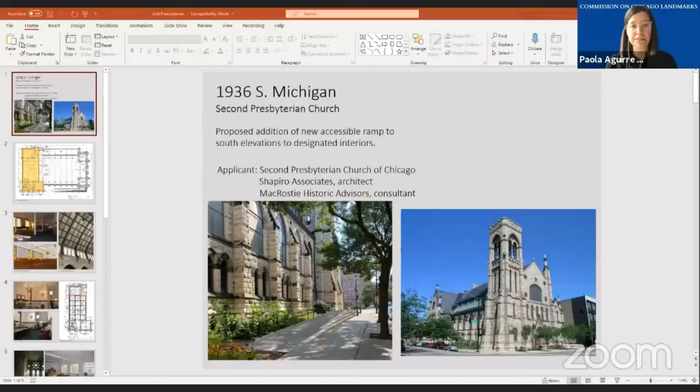We're going to move into item number 1, which is at 1936 South Michigan, the Second Presbyterian Church. I would like to call on Emily for the presentation. Thank you, Commissioner. So the church is proposing a number of interior improvements to the parish house, which is west of the sanctuary, as well as the addition of a new wheelchair ramp on the south elevation for an accessible entrance.

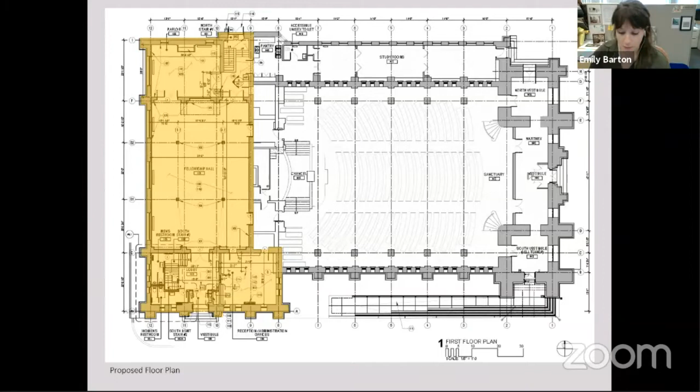So the church is proposing to make several improvements to the parish house, which is to the west of the main sanctuary space and highlighted in yellow.

The first floor of the parish house is home primarily to the double height fellowship hall and parlor. These spaces have been altered significantly over the past, and photos provided by the applicant indicate that many original features were likely removed in the past.

The wooden wainscoting around the room is proposed to be retained, as are the arched reliefs on the north elevation. The original stained glass windows to the west are also proposed to remain.

In the fellowship hall, there is currently a non-historic suspended acoustic tile ceiling that is proposed to be removed and replaced with a painted coffered ceiling with concealed LED cove lighting.

The design of the coffered ceiling is a simplified, compatible reference to the ornate coffered ceiling found within the main sanctuary. The walls above the wainscoting will be covered in acoustic paneling and a lightly textured wall covering.

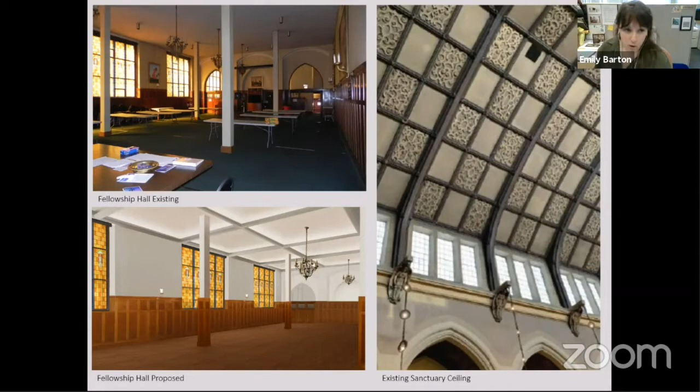And wooden wainscoting matching the height and profile of the walls will be added to the columns throughout the room. The non-historic carpet will also be removed and replaced with new wood plank flooring.

The parlor space is very similar to the fellowship hall, but without the paneled wainscoting around. So minor modifications are proposed to be made to this space, with the largest intervention being the addition of a full height wall to the east.

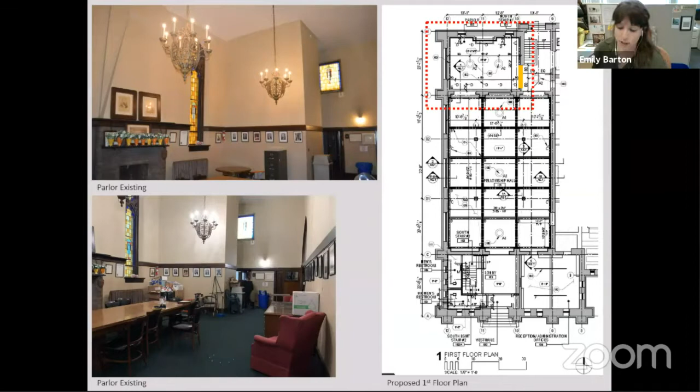You can see it drawn in yellow there to enclose the room, removing the currently open portal to the northern stair.

The third floor consists of the gymnasium, where no work is proposed, the boutique room, the music director's office, and the Oriel room, and a conference room.

Besides the ornate windows, which are proposed to remain, these spaces are largely plain. Two windows in the boutique room, which are not visible anywhere from the street, are proposed to be replaced in kind.

And similar to the other spaces in the parish house, the church proposes to replace the non-historic flooring and repair plasterwork as needed throughout the 3rd floor.

The church's southern stairwell is in the southwest corner of the parish house and will largely remain as is. The current men's and women's bathrooms on the 1st floor behind these stairs are proposed to be renovated with new fixtures and tile, with no work proposed in the main sanctuary.

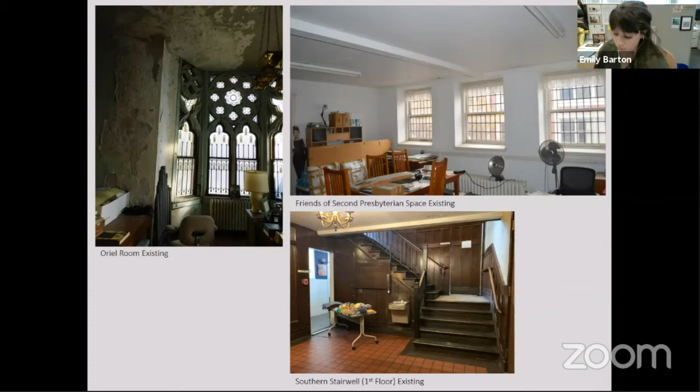Because of the significant modifications in the past, the compatibility of the improvements, and that the work will not result in removal or loss of any existing historic elements, staff recommends approval of all interior modifications as proposed.

So in order to add an accessible entrance to the building, the church is proposing the addition of a ramp on the south elevation, approximately 8 feet in width and 56 feet in length.

The northern side of the ramp will align with the south bell tower entrance bay, which allows for a significant setback from the sanctuary wall and windows.

Something else to mention is this won't encroach into the public way. It will still be on the church's property.

The existing stairs will be salvaged and put in storage for future use, and the new ramp will connect to the bell tower entrance with a 1/2-inch expansion joint, leaving the existing door threshold to remain.

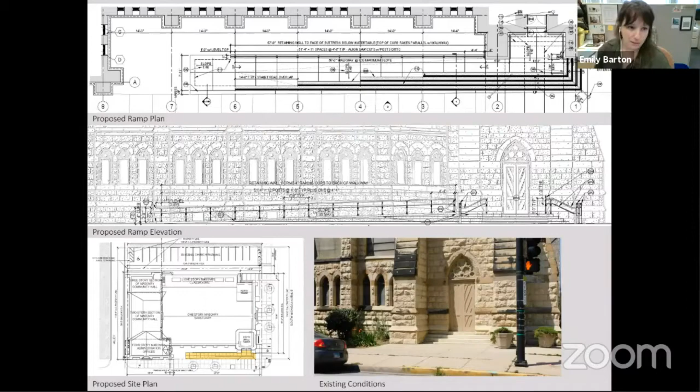The northern side of the ramp will also feature a minimal metal safety handrail with decorative posts to match the handrails on the east elevation of the church.

The ramp is designed to be constructed primarily out of concrete with an overlapping step design of sandstone stairs. The stone treads are 1 foot in width, with a new tread introduced approximately every 14 feet.

Because of the step design of the ramp, a second handrail to the south is not required, further minimizing the visual impact of the ramp to the building.

Because of the necessity to add an accessible entrance to the church, the non-intrusive minimal design, and the setback from the front facade, staff recommends that the new ramp will not be an adverse effect to the building and recommend approval as proposed. Material samples shall be submitted to staff prior to order and installation.

The last bit of work is on the west elevation of the building in the southern corner along the alley. The church is proposing to add exterior HVAC equipment in an existing setback bay. Two wooden bumper rails, approximately 6 feet long and 2 feet 8 inches high, will be installed to protect the equipment from vehicles driving through the alley.

This elevation is largely unornamental, as you can see, and because it is a secondary elevation, staff recommends that this location will not be an adverse effect to the building. So staff recommends approval with the condition mentioned. An approval letter from Alderman Dowell was included in your packets, and I believe we have a representative from the church, the historic consultant, and the architect here, if you have any questions for them.

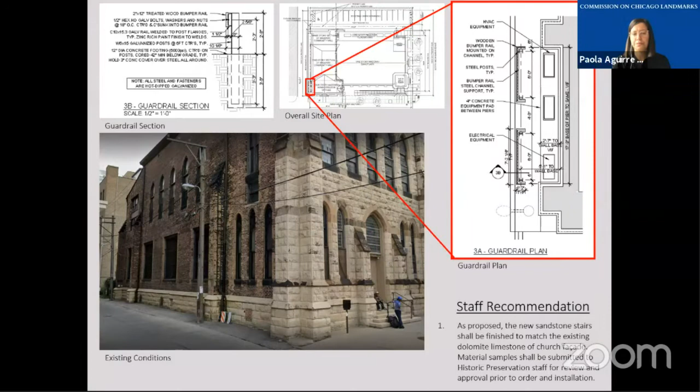Hi, can you guys see and hear me? Great. My name is John Kramer. I'm from MacRostie Historic Advisors here in Chicago. I'm serving as the historic preservation consultant for the Second Presbyterian team. I'm also a volunteer tour guide at the church for the independent nonprofit Friends organization, which helps with preservation efforts of the church. And I'm also joined on the Zoom today by a representative of the church, Mike Bellatier, and the project architect, Don Shapiro, in case the commission members have any questions.

In case you're not familiar with Second Presbyterian Church on South Michigan Avenue, it's a National Historic Landmark church, well known for its 1870s Gothic revival stone facade, its stained glass windows, and its very unique arts and crafts style interior. The congregation is making the proposed changes we're requesting today as part of a National Fund for Sacred Places grant opportunity, with the goal of making it easier for the public to access and enjoy this historic church. The team is also applying for funding from the Adopt a Landmark program. If you haven't been to the church, we invite you and all members of the public who may be listening in to please come down and see Second Presbyterian at one of our public tours.

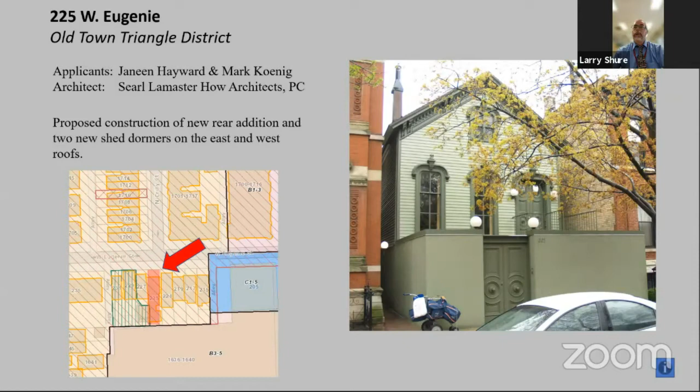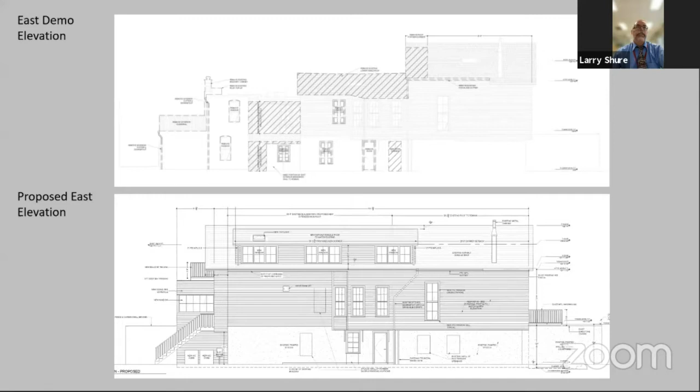The owners are proposing to remove portions of the existing rear additions to the building and construct a new rear addition which matches the width, height, and roof slope of the front portion of the property. They also propose to expand the living space on the attic floor with 2 new dormers on the east and west slope of the roof. This exhibit shows the extent of removal and the proposed additions on the east elevation, and the next slide will show the exact same thing on the west elevation.

As I mentioned, the rear additions are proposed to match the historic cladding and align with the existing walls and roof lines. In May of 2010, the commission adopted criteria to be used in evaluating whether proposed new dormers on front-facing gable-roofed cottages in the Old Town Triangle District will have an adverse effect on the district when such dormers would be visible from the public rights-of-way. Staff reviewed the proposal pursuant to these criteria and also reviewed a mock-up at the site to determine the potential visibility of the proposed dormers.

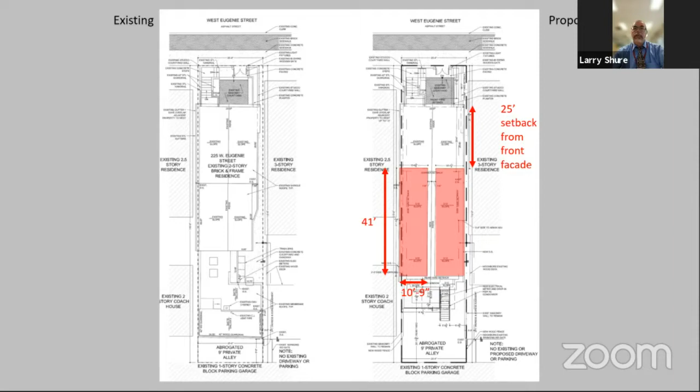The dormer policy for the Old Town Triangle District recommends a 25-foot setback, or a setback equal to 60% of the length of the primary gable roof structure, whichever is greater. The primary gabled portion of 225 Eugenie is 55.68 feet in length, resulting in a recommended setback of 33.4 feet. Therefore, the applicant would be required to set back the proposed dormers an additional 8.4 feet to meet the dormer policy.

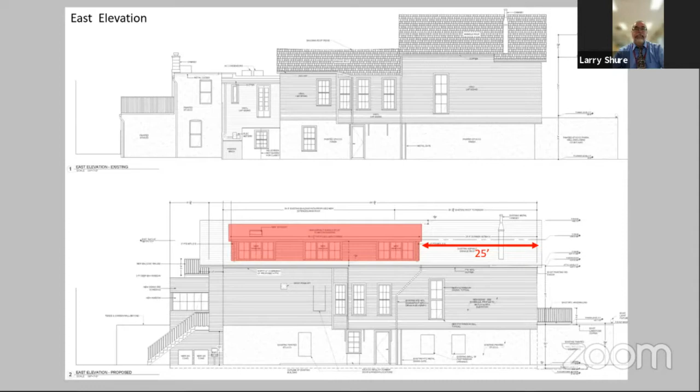In addition to the dormer, the applicant also proposes a skylight on the west slope of the roof. Staff recommends this be approved based on its minimal visibility, provided that the curb is low profile and matches the color of the roofing shingles.

According to the applicant, meeting the 33.4-foot dormer setback requires eliminating a bedroom, bathroom, and laundry room, due to their inability to provide sufficient floor area with the minimum required ceiling height. These are some graphics they put together to illustrate the additional square footage that would be provided by the 25-foot setback.

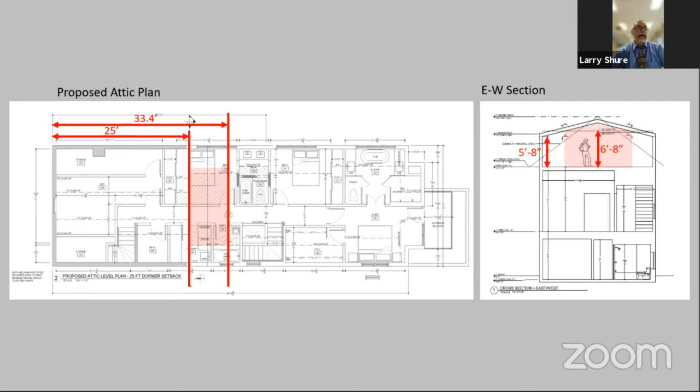The applicants provided dormer mock-ups for their preferred 25-foot setback for staff review. Based on the mock-up, the east and west dormers are somewhat visible from vantage points to the north. Because the property aligns with Crilly Court, there are additional points of visibility further north, though minimized by distance. These vantage points show visibility at the corner of Eugenie and Crilly, and further north on Crilly, as well as back to the east corner at Eugenie and Crilly.

To support their case for a decreased setback, the applicants provided perspective renderings from both the 25-foot and 33-foot dormer setbacks to supplement the mock-up provided for staff review. Based on the renderings, the dormers set back 25 feet are slightly more visible than those at the 33.4 setback. Here are some additional images showing the extent of visibility from those different vantage points up and down Crilly Court.

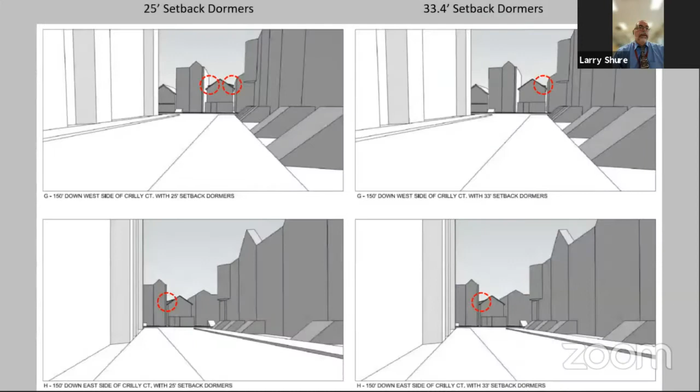In December of 2009, the committee approved construction of new dormers at 335 West Concord. In December of 2011, the committee approved dormers for the home at 319 West Concord. Both of these projects met the dormer policy but present greater visibility from the public right-of-way than the proposed dormers at 225 West Eugenie.

For that reason, we are presenting two options for recommended conditions of approval. The first suggests a strict interpretation of the policy, requiring the dormers be modified to set back 33.4 feet to meet that policy, with remaining conditions relating to the siding of the dormers and the proposed skylight. The alternative recommendation suggests that, based on the minimal difference in visibility, the committee could approve the proposed setback of the dormers at 25 feet, with the other conditions remaining the same.

That is really all I've got to present. I do want to mention that the architects and owners are at the meeting as well, and I believe they'll also want to address the particular issues of the project. If there are any questions for me, I'd be glad to take those now.

Thank you, Larry. Can you all hear me well? We continue to have this feedback sound. It's actually Larry Shure's device, too. Larry, please keep yourself muted until the last second you have to speak. That'll work. Oh, I see, is this better? Okay, great, I'm glad we figured that out. Commissioners, do you have any questions for Larry at this moment? I don't see anyone wishing to speak.

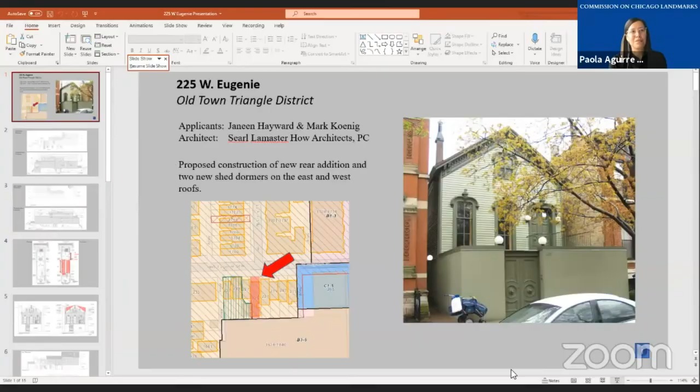Thank you, Joyce, for bringing that up on the screen. So yes, the impact—we're looking at the impact of 8 feet of difference, the 25 versus the 33 foot setback on the dormers, which seems very, very minimal to me.

Is there other cases, Larry, in which this condition has been—I guess the setback has been modified from the guidelines of the district?

Maybe not a one-to-one comparison, but it is not unusual to visually illustrate the differences between commission policy and the proposed increase or decrease of those requirements, to demonstrate that they are not a significant change between the two. I can't think of any cases where we did this with dormers, but maybe Deanna can—she worked very closely to develop those dormer guidelines.

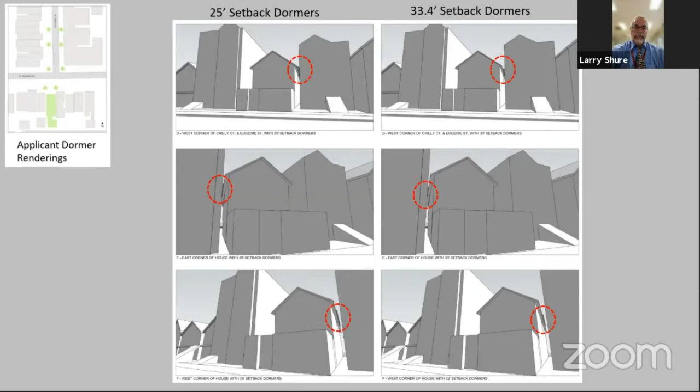I can add that I don't have a case regarding dormers, but I do have a similar case—if you recall, a theater on Clark, the Village Theater. It was a condition where the landmarks ordinance allowed a taller addition to be built a certain distance back, I believe 64 feet back from the front facade of the theater. As part of the project review, the developer showed renderings and studies of what it would look like if a taller building was built 64 feet back versus a little closer distance, and the commission did take that into account when making their decision regarding the overall project.

So I see this kind of similar, where you are basically judging what is the true adverse impact to the structure, considering all of the various circumstances, limited visibility, and frankly, also similar projects that were approved under the exact same criteria, but arguably more visible.

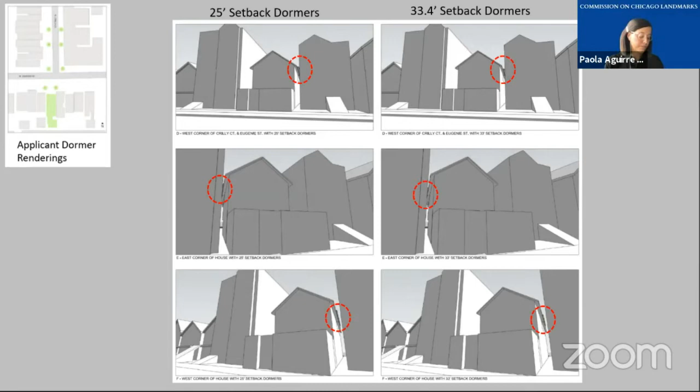Just because those circumstances were such that the exposure was larger, and you had a different context to work with. Thank you, Deanna, that's very helpful. Larry, too, that was very helpful clarification. Commissioners, do you have any additional questions for Larry, for Deanna, or for the project architect?

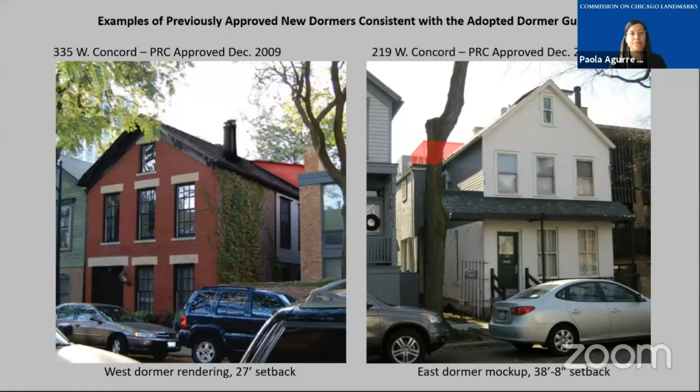I don't see anyone requesting to speak. Can we go to the last slide, please? So what we're looking at is the motion that we would be making would be for either of the alternatives, right? I believe so. Is that right, Larry?

That's right. We wanted to present both options so the commission could discuss and determine what was most appropriate in this situation.

And I'm assuming in this case, option A is a proposal that we're looking to support, and B is just in case we, as a committee, thought that the variance between the two options, the visual studies, would be impactful.

So, commissioners, I guess my question is, if there's no further discussion and questions for the staff or the project architect, I would like to request a motion to adopt the staff recommendation for A, which is kind of on top of this.

Yes, do you have a— it sounded like it may have been the reverse. A is for the 33.4 and the B is for the 25 feet.

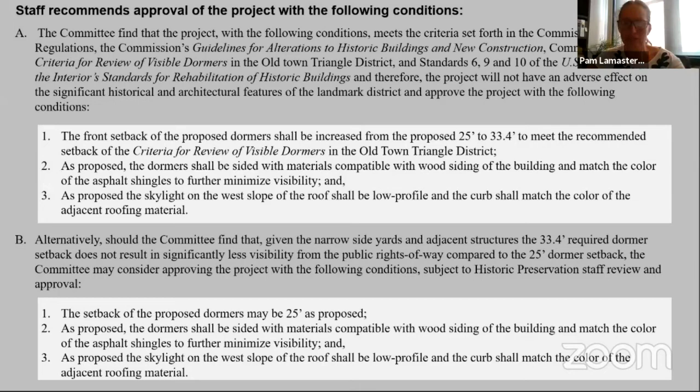Larry, can you help us? That's exactly right. The first recommendation strictly interprets the required setback for the dormers to meet the 60% length of the building of 33.4. The option B would provide some relief from that, allowing them to have a lesser setback, which is what they would prefer, of only 25 feet.

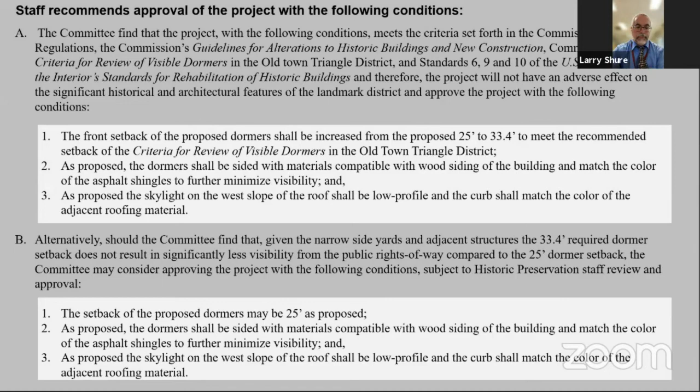Thank you, I'd like to motion for us to approve staff recommendations for option B. Thank you, Commissioner Hughes, I second that motion, Commissioner Oz. Thank you, Commissioner Osman. So I'm going to do a roll call on staff recommendations for option B.

Commissioner Ponce, yes. Commissioner Jakovich, yes. And myself, Commissioner Aguirre, also vote yes. So the motion carries unanimously, staff recommendation option B. Thank you so much again for presenting this, project architect and the owners that were here.

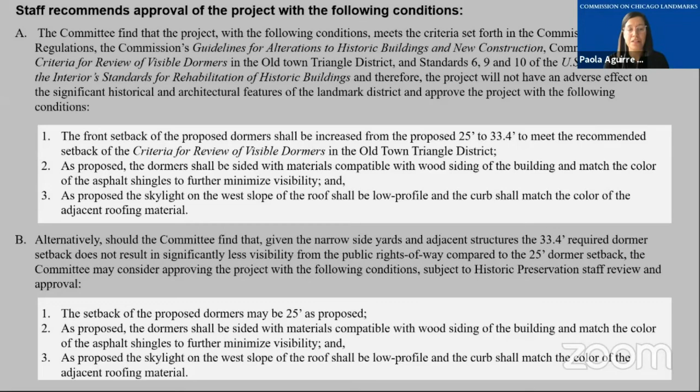Good luck with the project. We understand it's always difficult to expand and do work in this historic structure. So we appreciate your patience and the willingness to revise multiple times with help of our staff. Good luck. Thank you very much.

Our third item in the agenda, 7027 South Constance in the 5th Ward. May I call Emily for the presentation, please?

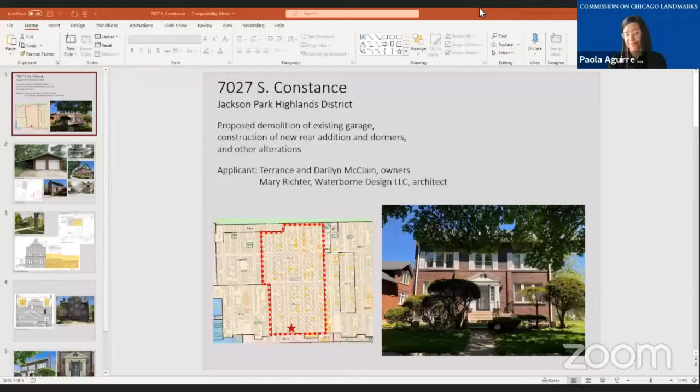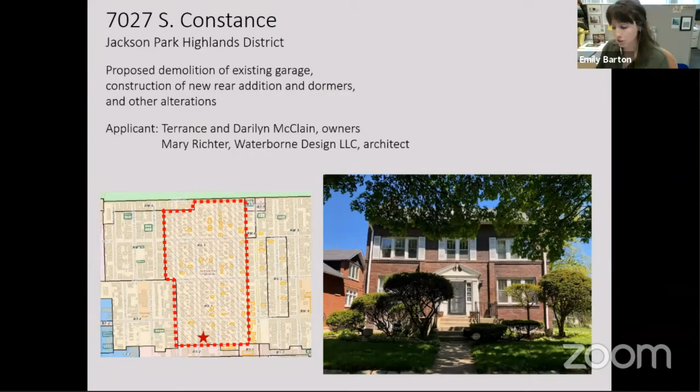Yes, hi Commissioner. So the subject property here is located mid-block on a double lot between 70th Street and 71st Street. The property currently has a small detached garage in the southeast corner of the lot, and the applicant is proposing to remove this garage, which does not meet their needs, and build a rear addition to the house with a new attached garage.

So the subject property includes a large main house, built in the Georgian Revival style, and a small craftsman style garage. Many of the properties within the district include garages that replicate the style and features of the main house, as you can see in the examples shown. This is likely one of the reasons why all structures were included within the designation ordinance.

While it is unclear when the garage at 7027 South Constance was built, you can see it's in a drastically different style from the residence, so it's very unlikely that the garage was original to the house. The garage is currently in poor condition, and the applicant would like to demolish it, building the new addition with a new attached garage, reusing the existing curb cut and driveway. Although quite old, the garage does not mimic the architectural style of the house, as is emblematic of the district, and staff recommends that its demolition will not be an adverse effect to the property or district.

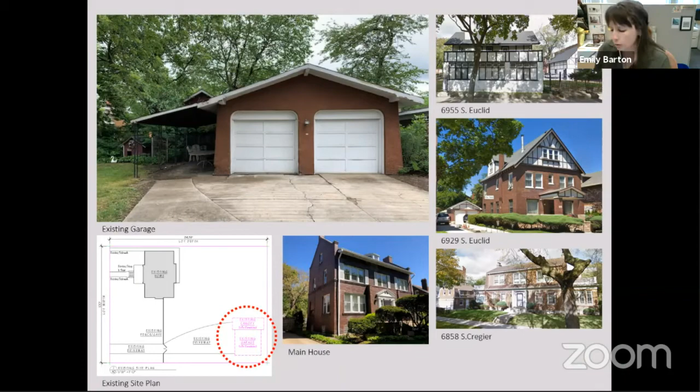The new addition is located entirely behind the existing footprint of the house. It is inset 1 foot to the south and 11 feet to the north, and proposed to extend approximately 41 feet 4 inches to the east, including additional living space and an attached 2-car garage. A new rear deck is proposed to the north.

Staff recommends, however, that this proposed location is the least intrusive, and because of this and the district context, staff recommends approval of the new addition with the condition that masonry samples be reviewed and approved by staff prior to order and installation.

The applicant is proposing to also add 2 new shed-style dormers to the rear of the house: a double window dormer approximately 8 feet long at the south, and a single window dormer approximately 6 feet long at the north. These dormers will allow for additional headspace in the 2 third-floor bedrooms. They will be located approximately 1 foot below the existing roof's ridge line and are proposed to be clad in a stucco finish. Because of their location, these dormers will not be visible from the street, and staff recommends approval as proposed.

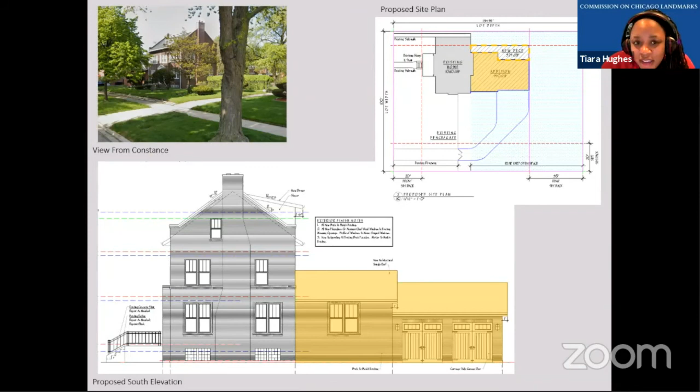Oh, also on the front of the house, it looks like one of the shutters is missing. Is that an up-to-date image, or is that just me being picky on that last photo, Emily? It does appear that a shutter is missing, yes, on the top there. I'm not sure, these photos are from a little while ago, I think, so I'm not sure of the existing condition, but perhaps the architect could speak to that. I didn't notice that either. That can be added back very easily. So thanks for pointing that out.

Yes, you can add that back as item number 4 on the requirements. I was just going to say that I'd recommend that as a 4th item if it is indeed missing. I don't know if this is an old photo or not. It actually could be sitting within the house somewhere. I'll talk to the homeowners about it and see if they've come across it. And if not, we'll have to replicate it to match. Awesome, thank you.

Commissioners, any additional questions? If there's no further questions or discussion, I would like to request a motion to adopt staff recommendations. Commissioner Hughes, since you had an addition, would you like to make that motion? Sure, I motion us to accept all of the staff recommendations 1 through 3, with the addition of 4 being for the owners to add the missing shutter back to the window. I'm not sure which direction that window is facing, but yeah, that's my motion.